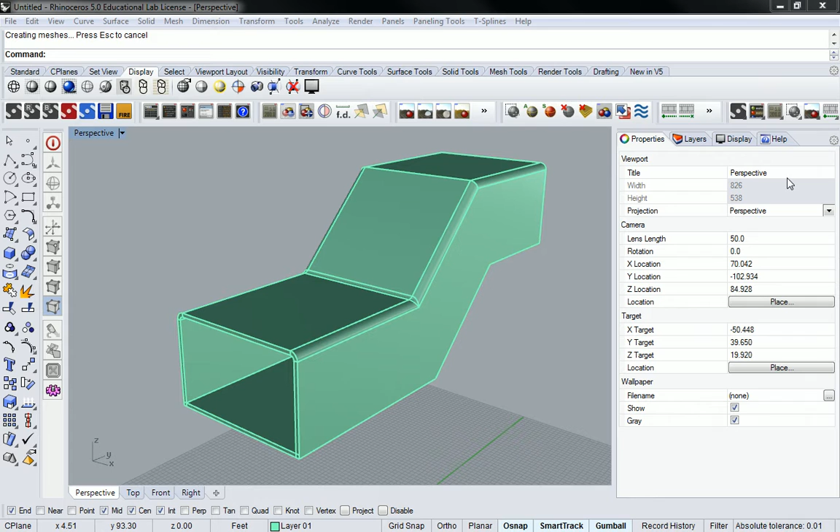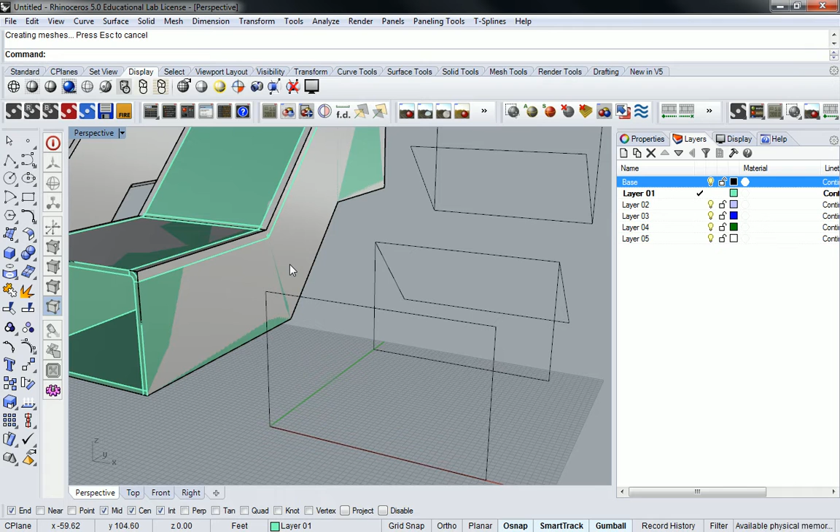This is a very regulated kind of exercise, but I want you to go back to these base curves real quick. With this iteration, I'd like to see you explore a tapering of part of your surface, which means we're not going to deal with surfaces that are all either 90 or 45 degrees apart from one another. You might have something at a slightly odd angle, and two surfaces blending together in three different axes rather than just two.

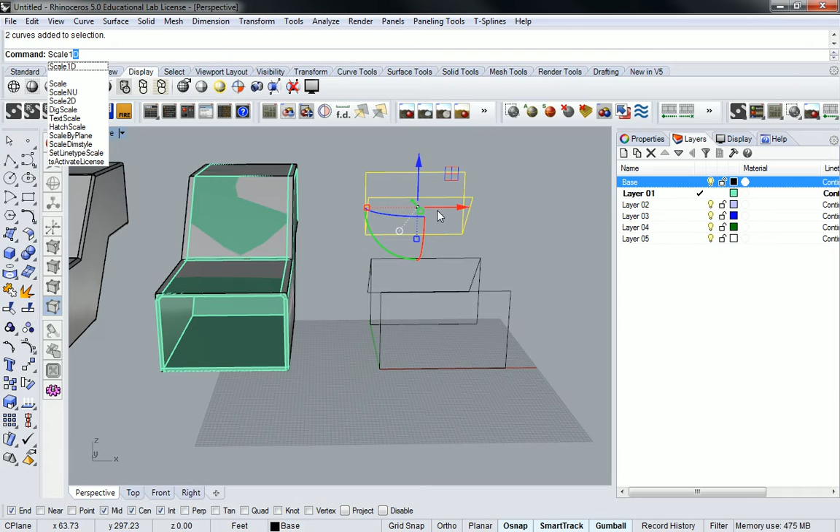Basically what I mean by that is what I showed you before. You can use the scale 1D feature, or however you want to modify these things. I'm just going to show you a quick one here with scale 1D. Scale one dimension is going to take the width of what this is and then shrink it down. That's how I did it before. Scale 1D, I'm going to go from here to there and then pull it back to the halfway point.

Okay, so now if I go back to a layer that I want to work on, actually let me just stick on the base layer for now. You can go through the same extrusion process and create a new volume.

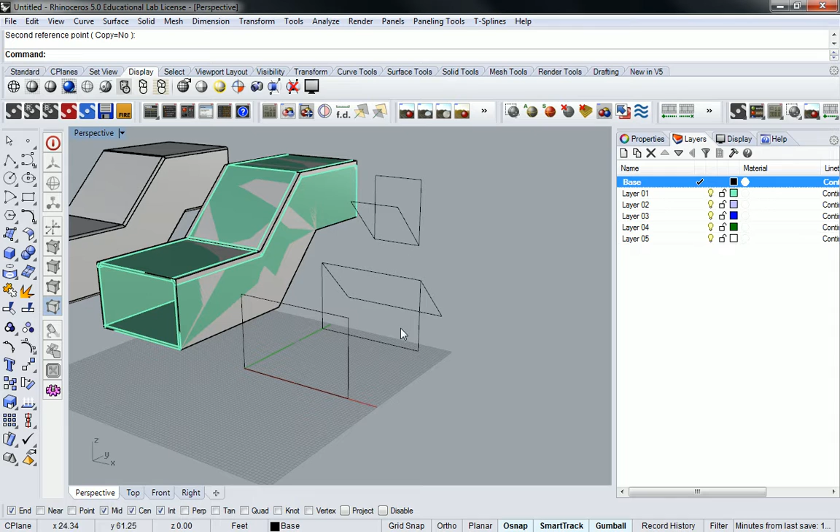But this time, because both of your curves are here, you can loft them. The loft command is going to take two curves and just loft them together. So like this one to that one, you hit enter and it creates that connection point, and then it pulls it through and lofts the two profile curves together.

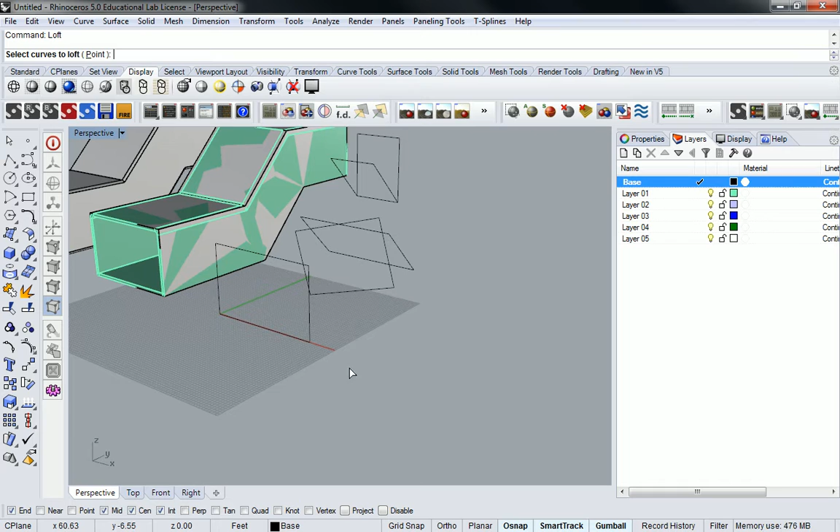Let me just do a quick deviation so you can see its kind of power. If I have it twisted, which you should not do in this case, loft it and it does that. Okay, so loft is very powerful. You use it a lot.

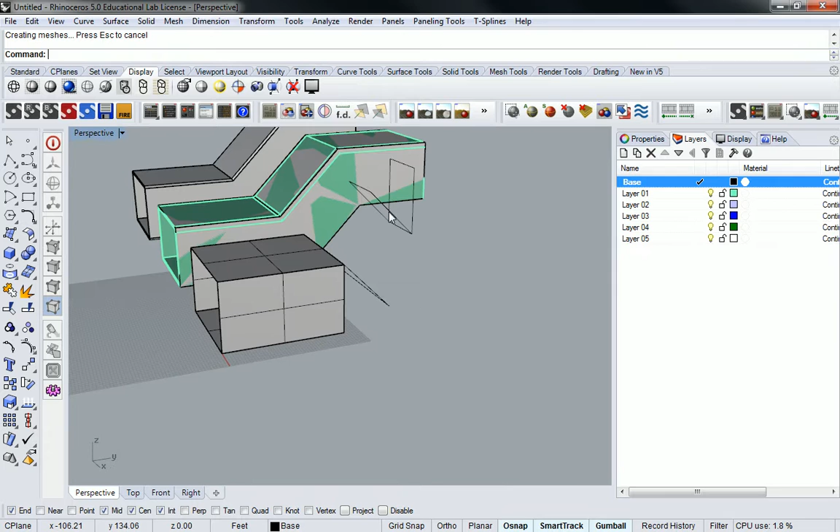So anyway, I want you to go through the process of redoing this, but the loft command is going to be your friend, because this one is pretty simple and it might save you a bit of time this time. But these two, because now you're tapering from one larger one to a smaller one, are going to behave a little bit differently than you would have been able to extrude with the gumball. You can't do this with the gumball. So I can select those two surfaces and loft them like this, hit enter, and it creates that tapered surface.

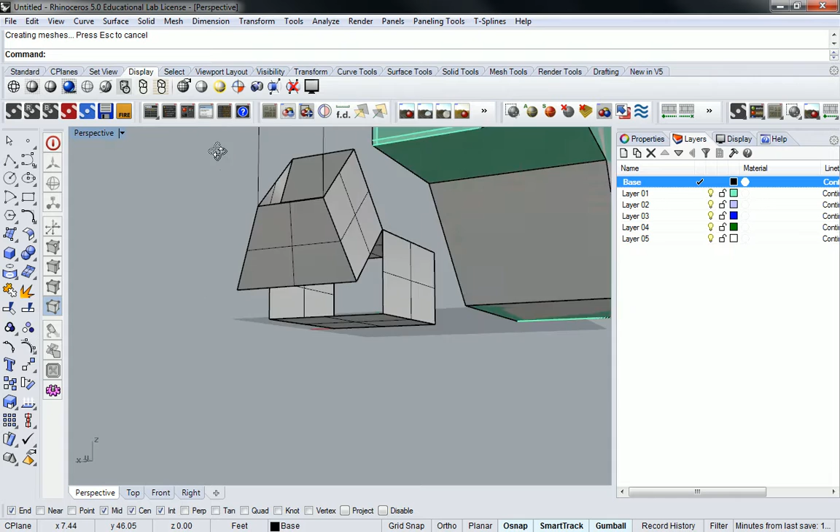I don't think I've ever really used it, but theoretically, yeah, I imagine you could. And then this one I can actually go back to my extrusion like that.

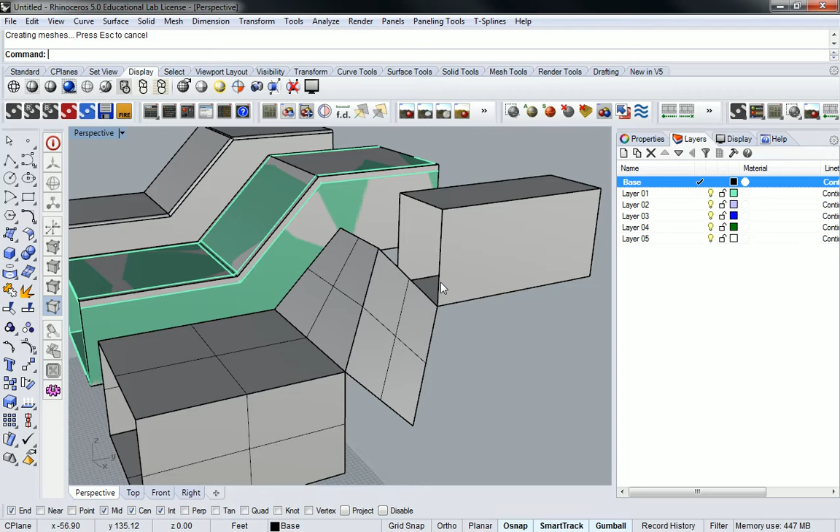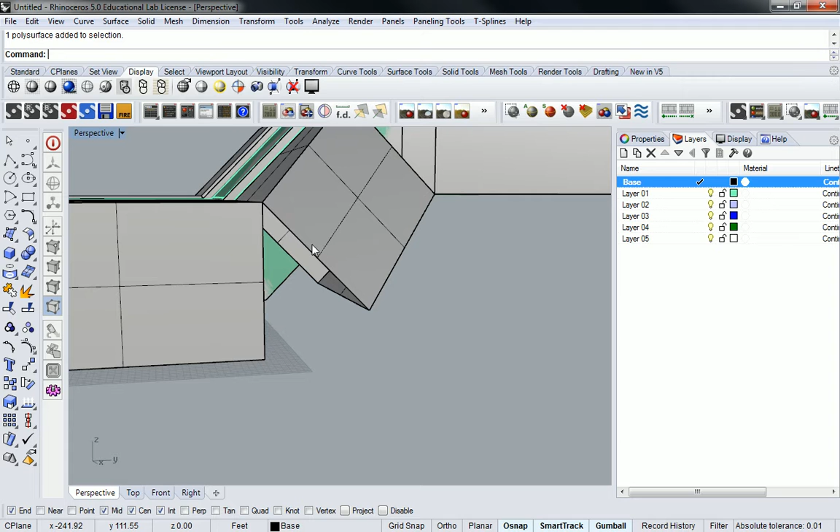What the challenge is here is I want you to think about two things. The filleting process really isn't going to be that hard, but as a segue into what we're going to experience on Thursday and with the future of your assignment, I want you to now be thinking about, if I just take this edge and start to extrude it, or if I take the overall surface and basically just scale it up from where it is, how is that corner going to be resolved? So you need to be thinking about, is this going to come down to a point there and then go back, or am I going to flatten this out and then use a curve?

So this is a little bit of a trial design exercise to resolve some of these questions. I'm presenting it to you so you need to think through it a little bit on your own, because in the next assignment we're transitioning to a little bit more design, slightly more design, not much.

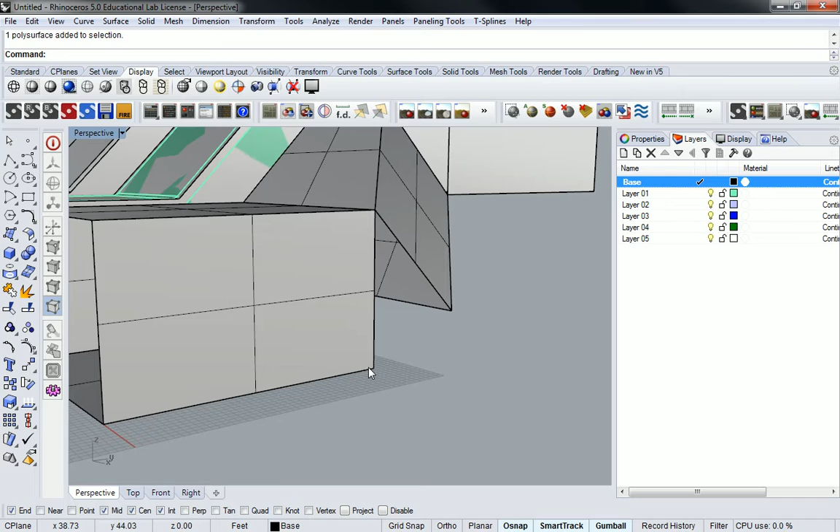Okay, so you don't have to do exactly that taper. Feel free to take a few minutes to try a few out and consider some. But by the end of class, I want to see, and you don't have to go to the filleting level of detail unless you have time, but I do want to see that you have a fully resolved new form with a modifier that doesn't just go up with exactly the same extrusion size.

Any questions? Is this too much that I'm asking you for, or do you think you can handle it?

All right, yeah. Do you still want to do that same type of step? You don't have to, but it's a good place to start without getting too crazy. I don't want to throw too many variables at you too fast. So if you keep the two step, with a transition in the middle, whatever that transition looks like, I would stick with something like that.

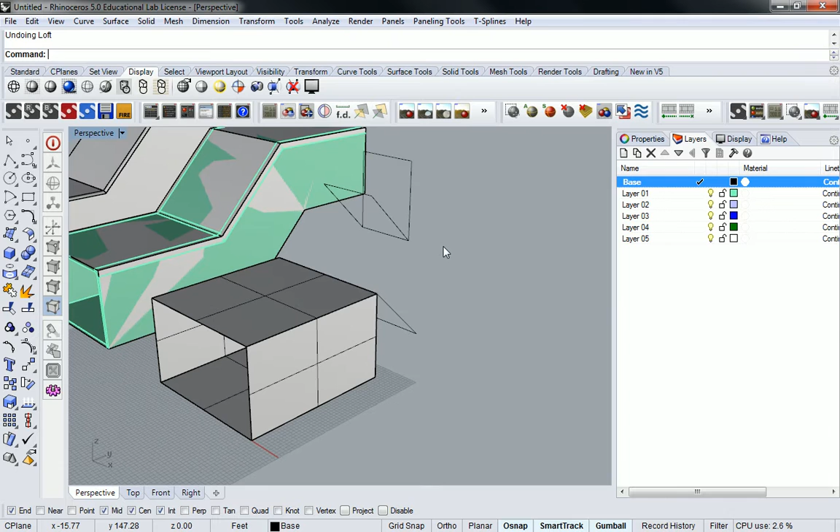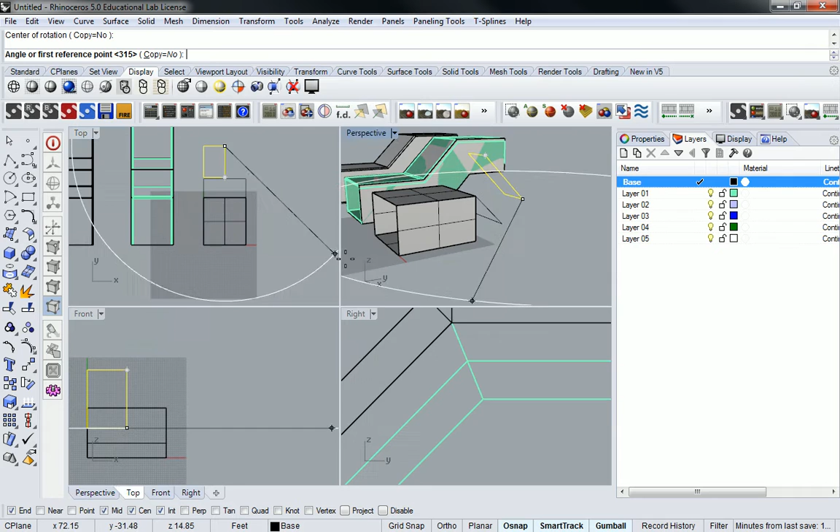To expand upon that, an example of another way you could modify this is not just the width of it, but also you could change the height so that maybe I'm going to do a scale 1D from there to there and just kind of pull that down a little bit. So maybe this actually, there to, well, let me do it there. Oops, hang on.

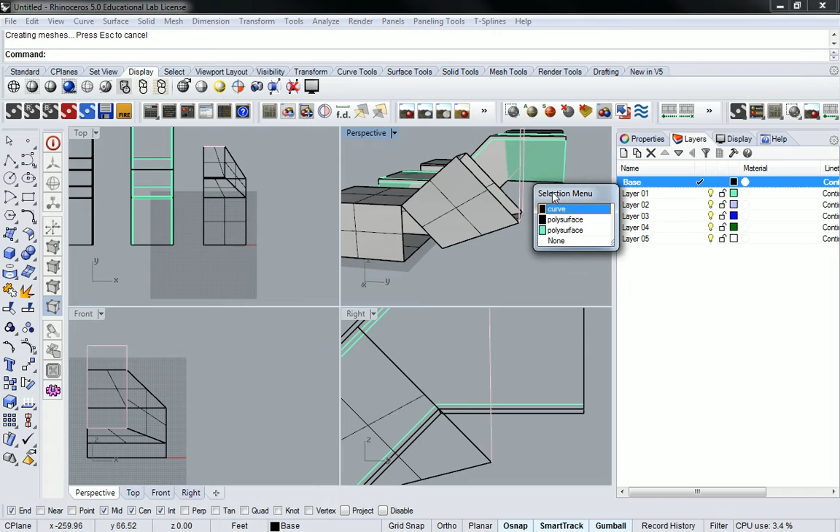Curve. Rotate. There. Well, I screwed that up a little bit, but you'll get the idea. So maybe you don't just transition to a smaller thing, but maybe you also change the height. So when I loft this together to that, it's super morphed, and then I have this one here that's going to look really funny right now because I did it wrong, but like that.

No, don't do rotates yet. Because what happens is if you do rotations, you wind up with warped surfaces, and warped surfaces bring about a whole other different type of modeling exercise. So no rotations, keep it generally orthogonal except for where you change the transition between orthogonal elements.